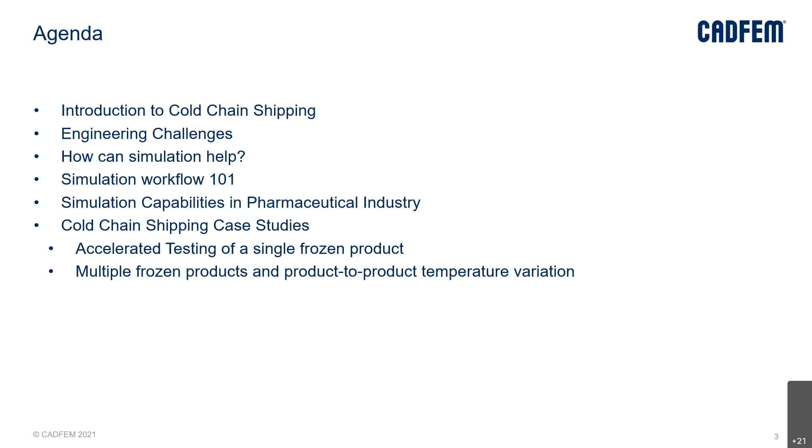Well, before directly diving into the case studies we wanted to show you on the topic, we will go through certain generic slides, especially examples picked from the pharmaceutical industry, so that we can create a basic ground of understanding before we touch the real topic, for you to understand the importance of simulations and what exactly simulations can bring to the table. So we wanted to discuss it in that sense.

Well, I think this is what we already discussed. Pharmaceutical drugs especially are more sensitive in these cold storage scenarios, and they require transport only in colder conditions. So the requirements of cold chain shipping: the possibility of goods degradation has to be minimized, and product quality has to be assured. The product, by the time it reaches the destination, still has to have the proper quality without any disturbance.

Certain parameters that you can optimize within simulations are also seen here. The cooling technique itself, the right material, the dimensions of those materials, length, breadth, height, and any curvature dimensions, and the whole design of the shipping container can all be varied. You may have many concept ideas from domain experience and expertise, and you can translate them into simulations by playing around with a lot of parameters.

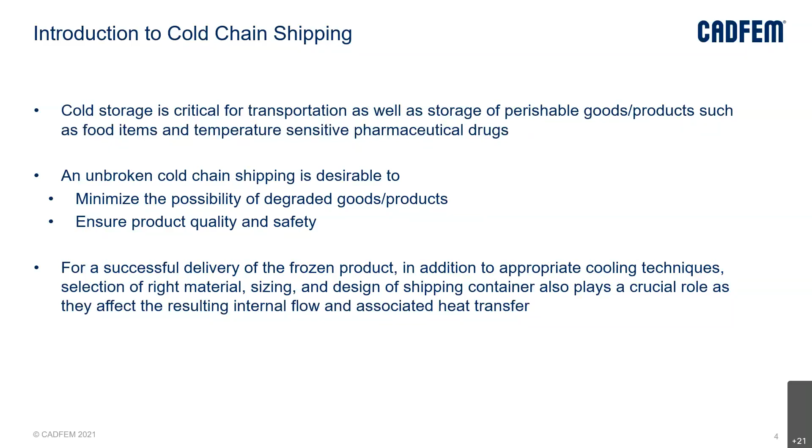Well, different products, based on what product you're trying to target and transport, right? You do have different kinds of requirements of how they are supposed to be stored within different temperatures. Blood, if you're transporting that for medicinal purposes, should stay between 2 to 6 degrees centigrade. A drug vaccine usually should be staying between minus 70 to 5 degrees centigrade. Frozen food needs to be at minus 18 degrees centigrade.

So as you can see, for drug vaccines, there is a bigger range that we are showing here, because it could really matter from case to case. These days, the technology of storing materials like these in required temperatures is tremendously changing. It's not just active cooling techniques that are adopted in this industry, but this industry is also adopting passive cooling technologies such as phase change materials.

There are these special phase change materials that are gaining popularity for their merits these days in the automotive and also in the medical or other cold chain logistics industries. So they qualify, they deserve to be a very good R&D topic as well.

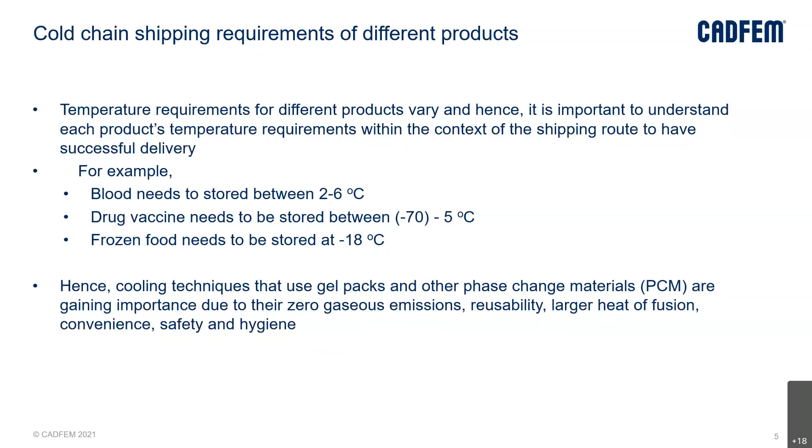Engineering challenges. When we are talking about these engineering challenges, we would like to focus more on the drug product in transit. There can be unexpected temperature extremes. There could be customs delays. It could really stay down just because of a customs detainment because some papers are missing or something else.

There is a possibility of mishandling in the way it is being carried. There could be multiple partners or parties involved in the whole supply chain that could also cause some mishap. Different drug products could have different packaging materials.

All in all, the reason why we talk a lot about drug products in transit is because if they are not stored at the given temperatures, the loss is not just about their vaporization and the loss of the material, but about changes the temperature can cause to their medicinal values or properties. A drug would probably not evaporate a lot at temperatures higher than prescribed for its storage, but its medicinal properties could be killed when exposed to higher temperatures. That's a bigger risk.

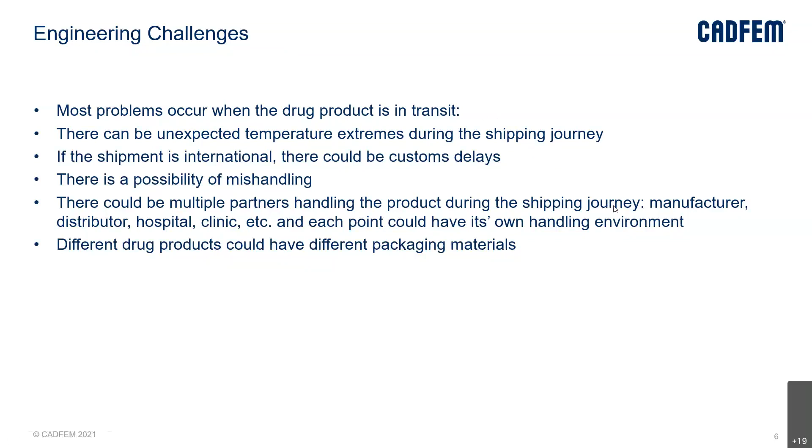I mean, the drug in that case could even act differently, posing more side effects instead of curing the targeted disease or the problem with the patients. So that's the reason why there are very strict regulations imposed by the FDA in order to look at the quality of drug products in transport as well. That's why, though we say that it applies to the chemical industry, the pharmaceutical industry, and also the food industry, maybe our emphasis is more biased towards the pharmaceutical industry for those reasons.

Well, how can simulations help? You will see more about these in certain examples that follow from this particular slide. Instead of directly diving into the main topic, we will give you a glimpse of how exactly simulations can make a connection to realize a practical advantage. That's what we see in the next slides. They could also, for example, see what major or minor changes can be made to the shipping container so that it can be quickly, easily delivered with the quality expected.

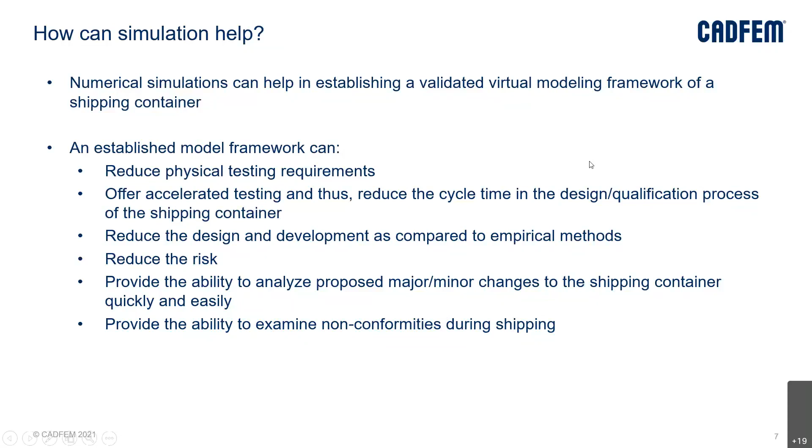For example, if we are talking about some product which can undergo sublimation, in that case we are talking about mass transfer models. We do have phase change mass transfer models, which require certain basic properties, like the solidus temperature, liquidus temperature, the saturation pressure, saturation temperature, standard state enthalpies, etc. These have to be entered as inputs. Then the outputs will constitute the exact evolution of mass fraction changes due to the phase change process being applied to that particular drug, or food losing moisture, etc. So these can be simulated.

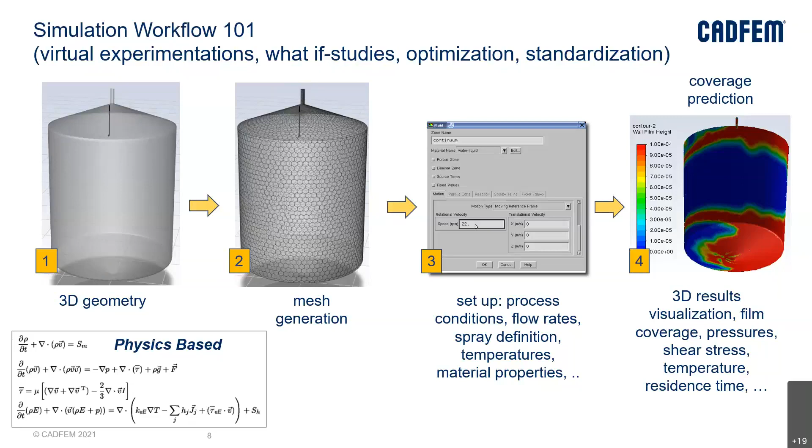What simulations bring up is also a visual treat, a lot of opportunity to very clearly visualize data. You can think about it as a CT scan or an X-ray. A doctor, in order to know the condition of a patient, would get these CT scans or X-rays done, and a diagnosis is completed by doing so, wherein the treatment starts. It's a similar situation here: to efficiently complete the diagnosis by looking at the visual data, which perhaps is not available in that level of detail if you are just relying on physical experimentation.

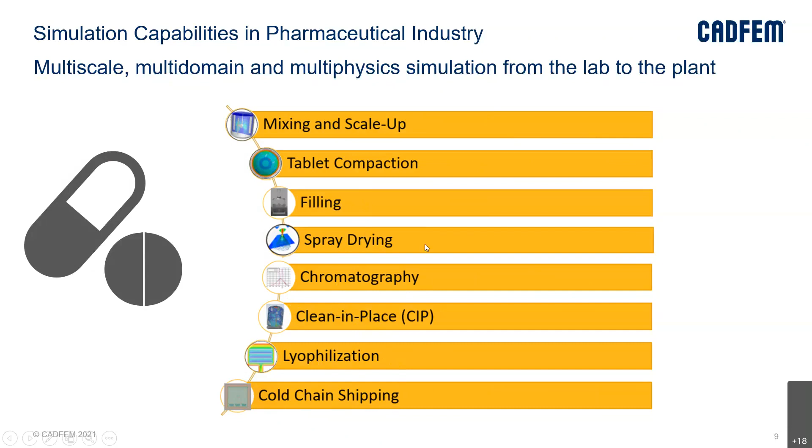There are so many unit operations which can be focused upon and led to success by using simulations within the pharmaceutical industry. The foremost one is mixing and scale up. You can use a lot of models to simulate this; you will see it in the subsequent slide. For solids, it is about mixing, tablet compaction, etc. Even operations such as vial filling can be simulated. Spray drying, chromatography, clean in place, which we briefly spoke about, lyophilization or freeze drying, and yes, cold chain shipping as well. We'll also see case studies and some examples of this.

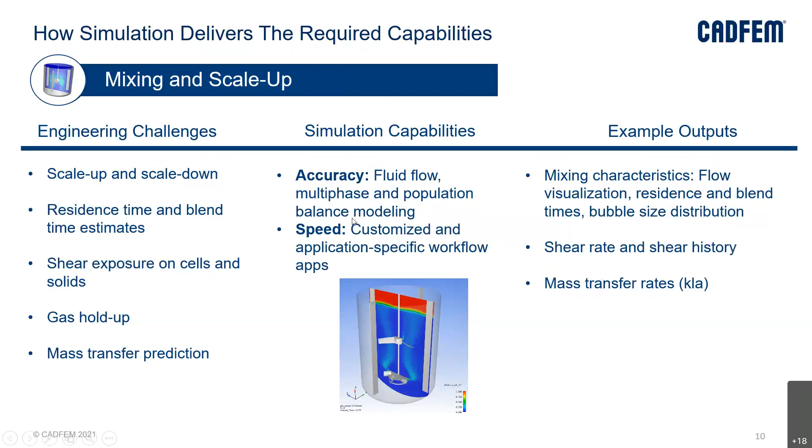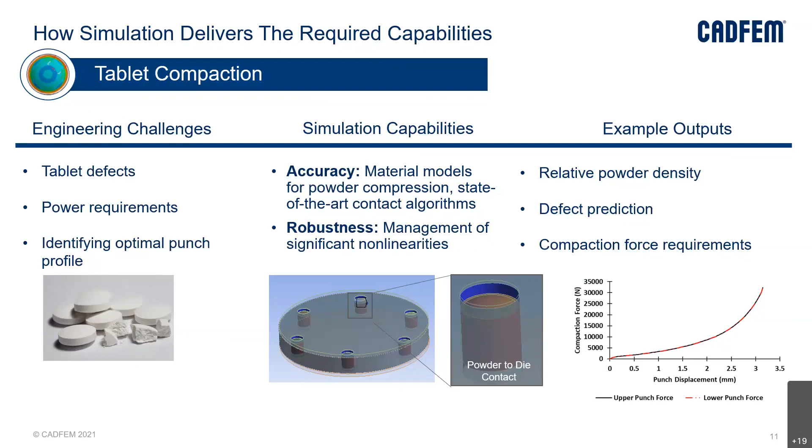There are shear rates that are responsible for that. You need to look at certain shear rates, shear stresses in the form of turbulence, and entrainment of air as you go on to fill a particular vial at a particular rate. There is also a roping phenomenon that can happen within the liquid container. All this can be directly related to the angle at which you're filling the vial, the rate at which you're feeding the mass into the vial, or if the vial is experiencing any shaking during filling. So basically, air entrainment can influence the quality of the material that goes into this vial.

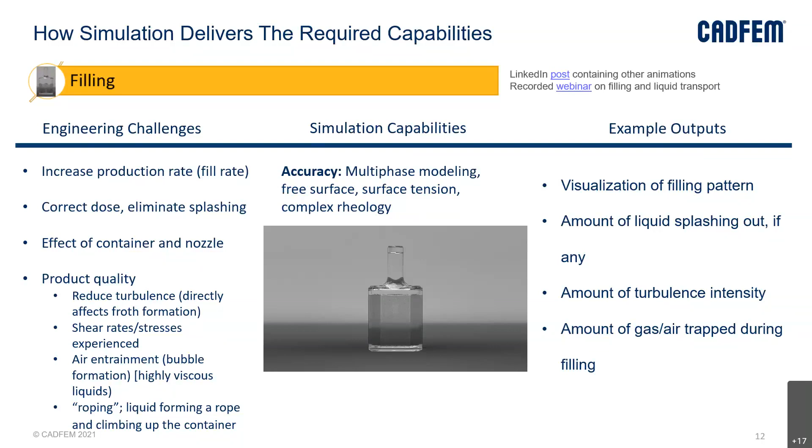So that's probably also something related to the packaging industry, as they do the packaging into vials. These can actually be simulated because the simulation interfaces provide multi-phase models which take into consideration the viscosity effects, the surface tension effects at all scales, and the turbulence effects, not to forget.

There are processes such as spray drying, wherein again the physics changes. It is about the breakage of a continuous sheet of water or any liquid into droplets, and the droplets breaking again, forming a mist, with different size distributions, spreading parameters, etc. Since we have appropriate models to consider that, spray drying may also involve high temperatures imposed into a zone, so you can consider these temperature effects along with radiation heat transfer as well. All this is covered through appropriate models that involve primary atomization, secondary atomization, and breakup models, etc.

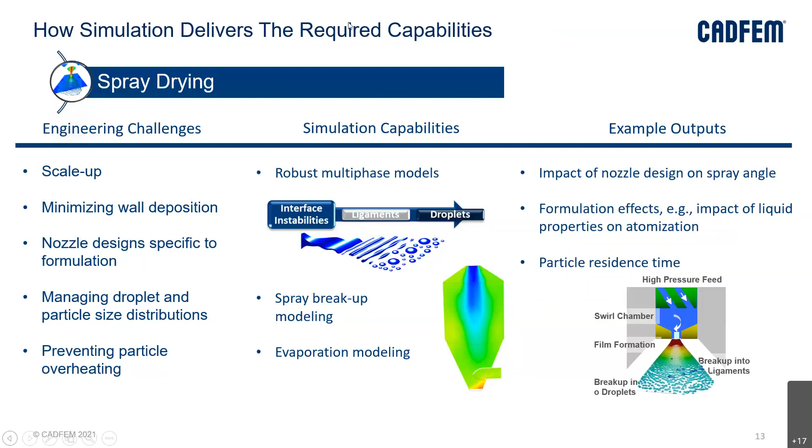Chromatography as well, it is a way to separate certain useful ingredients, and it's possible to see through diffusion, porous media characterization, etc., how to look at the dispersion quality once it comes to chromatography.

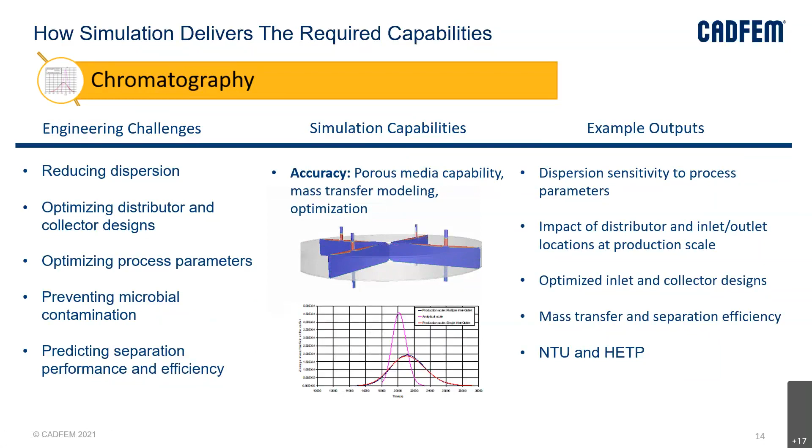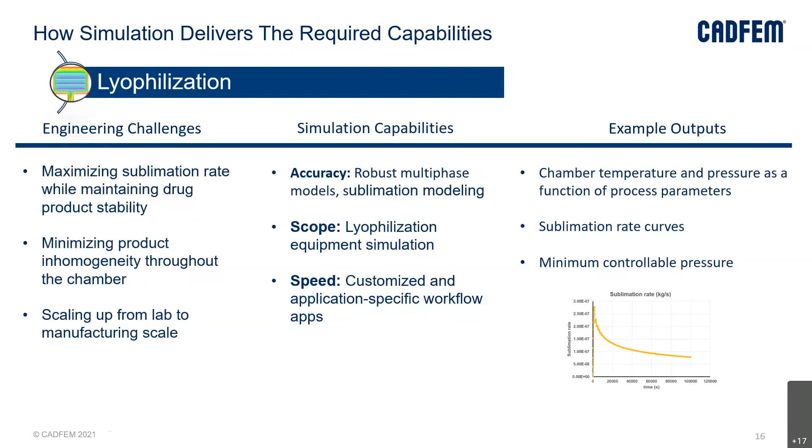Clean in place is something we already discussed. Lyophilization, that's freeze drying, which involves processes such as maintaining a proper pressure within the lyophilizer or lyophilization container or equipment, and next, being able to simulate for sublimation as well. So yes, it's possible to simulate these effects as phase change. Now we come down to cold chain shipping.

What you need to find out through simulations is the temperature variation within the shipping container as a function of time, and even the temperature variation for the frozen product as well. So the variation of temperature at different locations as a function of time is what we focus upon as outputs.

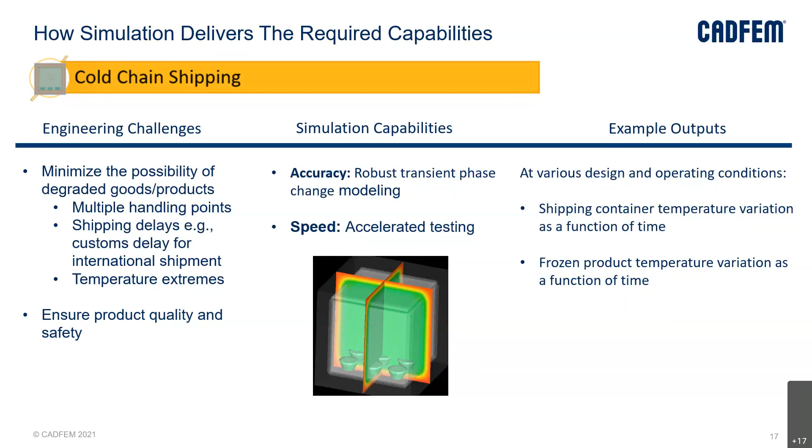This is some problem description wherein it's modeled as a 2D case. What you have here is an ice pack, modeled as a eutectic plate, and upon that there is a frozen product to be transported over there. Since the geometry is symmetric, we take only half of it.

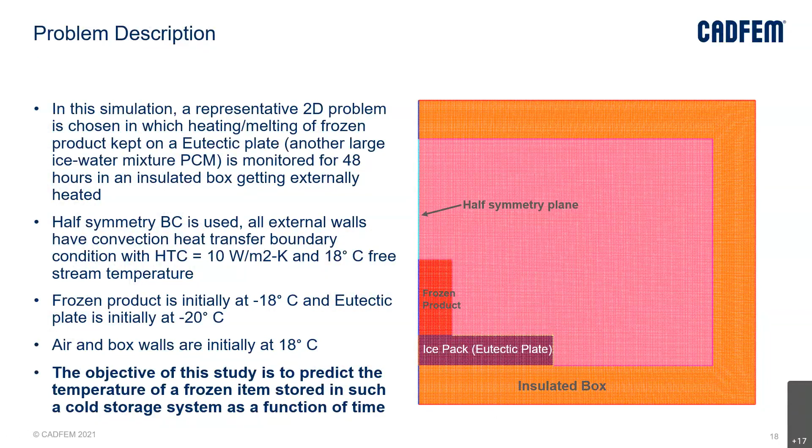In the interest of time, there is an insulated box as well. So you put some heat sources around it, and try to heat it, and then see what kind of phase change occurs in both the frozen product and the ice pack. After 5 hours of subjected heating, the heat is calibrated according to a solar load or any other load that can contribute to the heating of that particular transportation.

After 5 hours of heating, you get to see the temperature distribution like this at different places. The air within the box is experiencing a lot of heat diffusion, and you can see the temperature field at every place. That visualization leads you to effective diagnosis, and that diagnosis with authenticate data produced through simulations can guide you to take the right form of decisions.

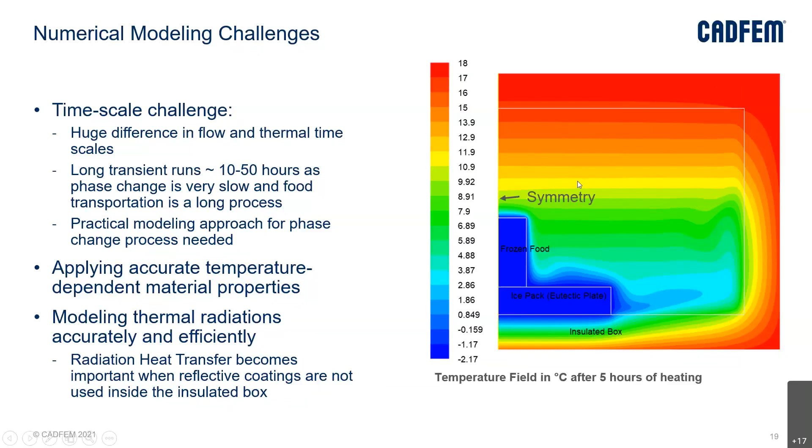The problem in these type of simulations is to figure out a modeling approach which can consider small enough time scales, because when it comes to the transport of heat through diffusion or convection within fluids and solids, you have to look at the thermal diffusivity, and it is definitely different for air and wood or other packaging material. So the time step size in simulations has to be selected very carefully, accounting for these differences in thermal diffusivity between different materials.

So once a particularly decent value is estimated, it is definitely possible to simulate these effects in a shipping container.

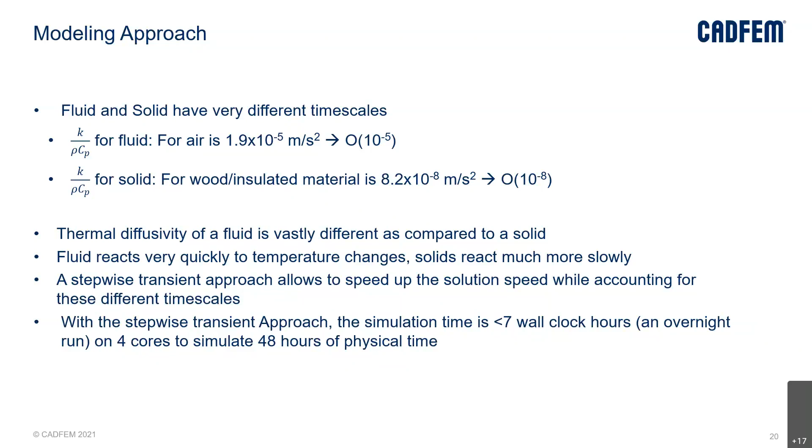You can also look at plots like these where you are looking at certain static temperatures at properly inserted monitor points. You can go to any XYZ location, insert monitor points, they become your probe points, to be honest. Those probe points give you the history of how temperature changes at that particular location in a time varying sense.

Not only that, you can select certain domains, for example the ice pack and the frozen food zone, and monitor the volume averaged minimum temperature of food and ice pack in that case. Whatever you monitor can be generated out as time bound data, noted across time, and that way you can find out the temperature variation.

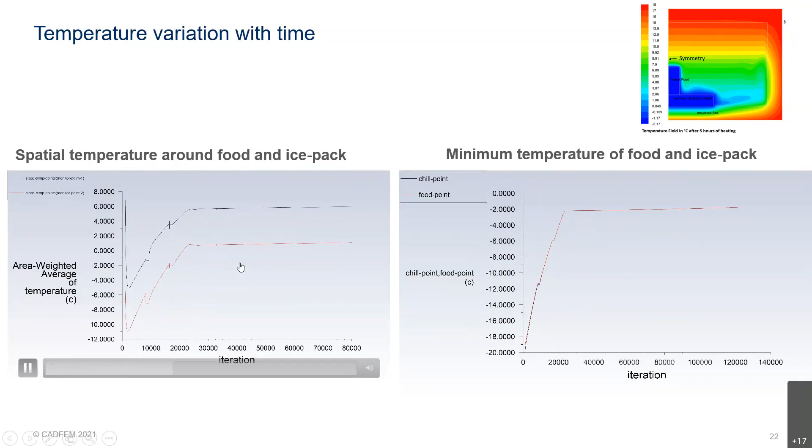This is more important to find out how indeed it's possible to work with changing the refrigeration technique, or maybe changing the dimensions of the container and so on. As I said, there could be differently related ideas that are at a concept level just from the domain expertise.

You can see in this video how there is a shrinking of the solid zone, or the ice zone, over there. So how the ice is melting can be seen directly like this in a given set of conditions over time.

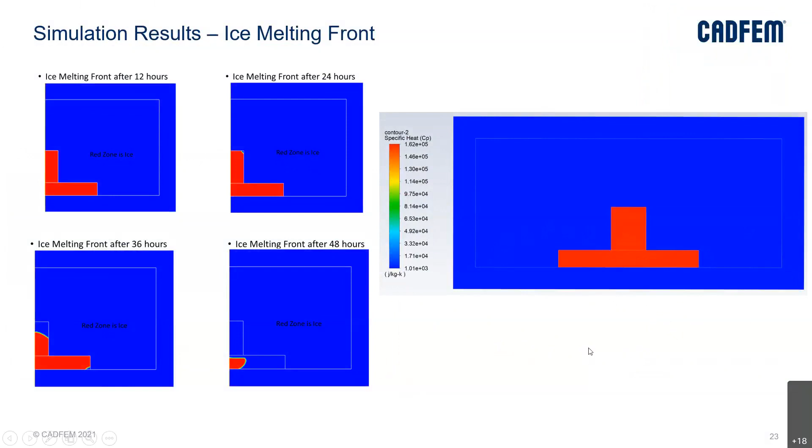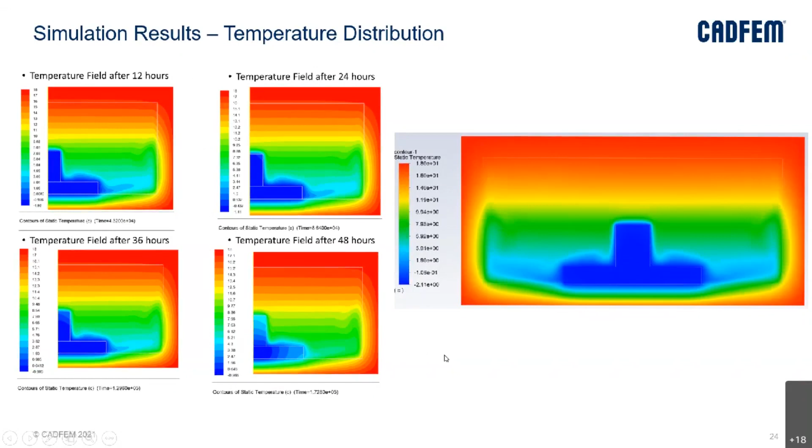The ice melting front was seen in the last one. At different times, you can see the temperature field as well. It can be recorded into an animation and seen in a more visualization sense. You have it after 12 hours, 24 hours, 36, 48 hours. So you really can simulate, and in fact, it is like looking at a futuristic effect directly in simulations.

And look at other quantities like velocity magnitudes as well by using simulations.

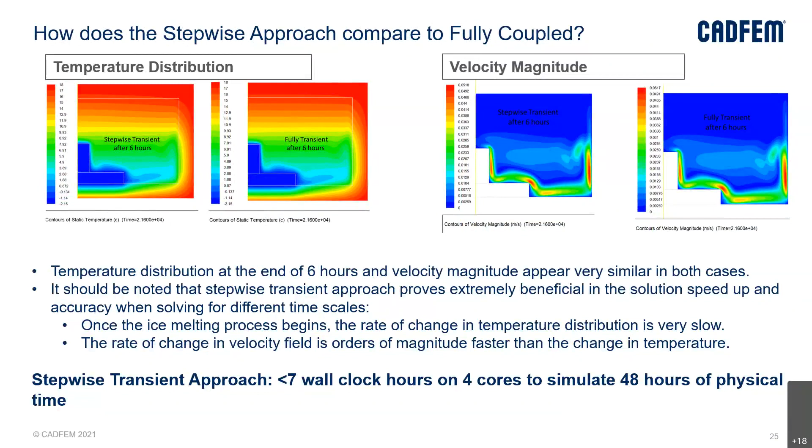This is another example where different pieces of yogurt are actually placed. This is like a 3D simulation, of course. Instead of a 2D simulation, we are able to perform 3D. And a lot of useful data has been extracted from simulations, especially about the temperature distributions within the container.

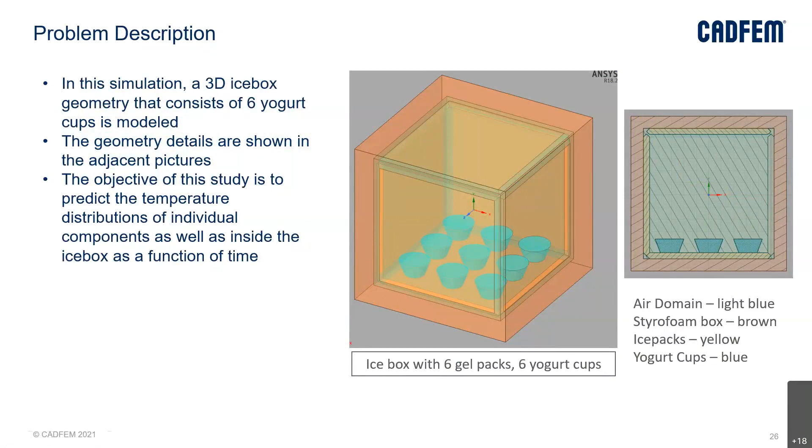Not only that, it was possible to place probe points within each of these yogurt like containers. And it was possible to find out the time-based change in the temperatures, transient change in the temperatures.

So you can even record it like this, and with the flow time, see how it varies as a temperature at different points. Here you have like 9 yogurt containers, and essentially you can place a probe point as a location in all of these 9 of them.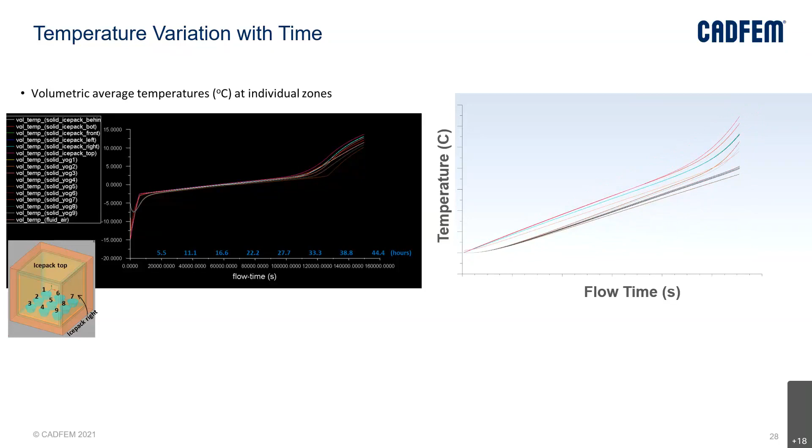And really see not only the heat, but also if there are any phase changes. So in the last example where food is just transported by being placed upon an ice pack, we did see phase changes as well. Yeah, so that's possible through simulations.

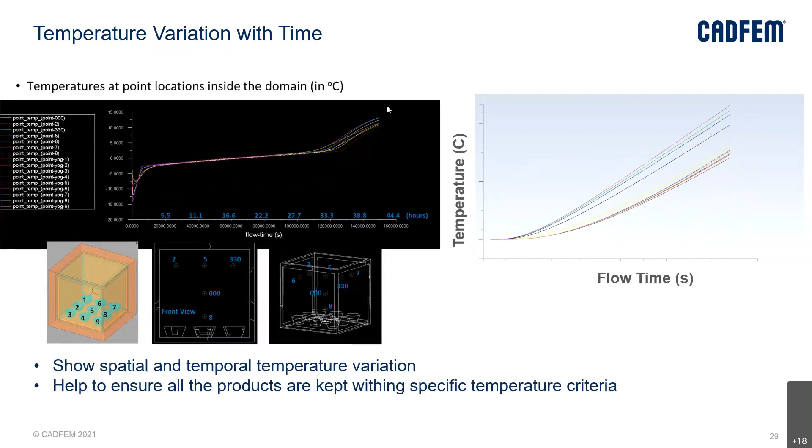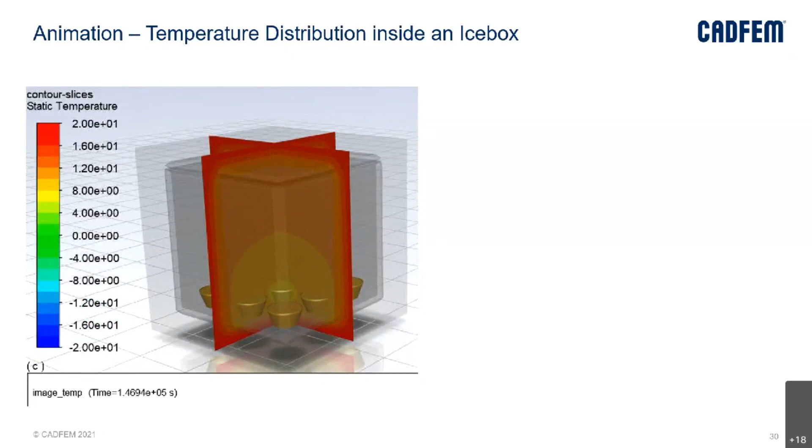More insight on the variation of time and the variation of temperature with time in the same case. So you can have any sort of contours at different sections, giving you a proper understanding of how the temperature field is evolving, as it is so dynamic when exposed to certain transportation conditions.

Therefore it is possible to look at how the temperature changes inside an important shipping container just through simulations. So this is a particular recent case study we were talking about, by a company in Switzerland, a logistics company called SkyCell AG. They have come up with a very innovative shipment container using an intelligent or smart refrigeration system.

Whenever we say smart, we have to think about this acronym IoT, Internet of Things. It obviously has to communicate with a tracking system. So these people from SkyCell have been transporting medical vaccines. They have a good experience and reputation in that area in Switzerland.

So they stepped into using simulations to improve their construction of the container for such sensitive operations. They in fact ended up doing multi-physics simulations, which is to say, for example, they have to mount up certain antennas linked to certain sensors as well, a whole intelligent system embedded into this particular container, with sensors placed at different places.